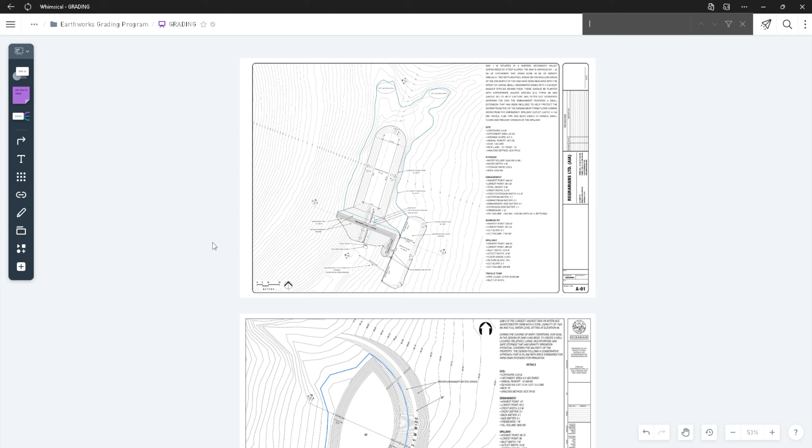Here on this board, I have laid a few examples of some grading projects so that we can break them down and I can show you how I've approached doing those and just run you through my thought process and how I structured the project and then how I went about doing it inside of CAD.

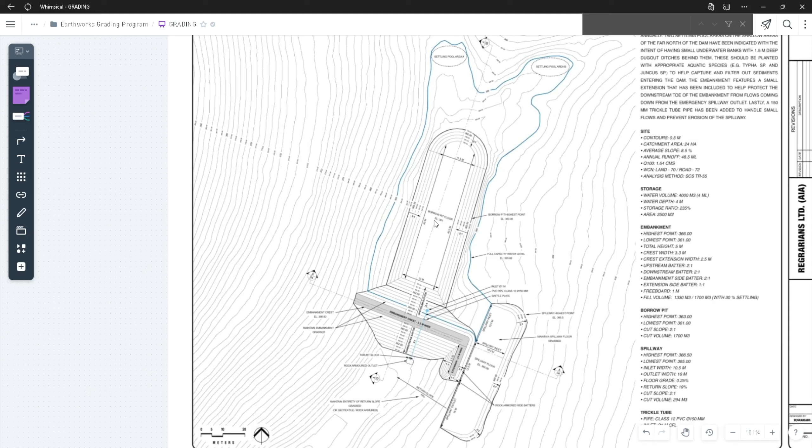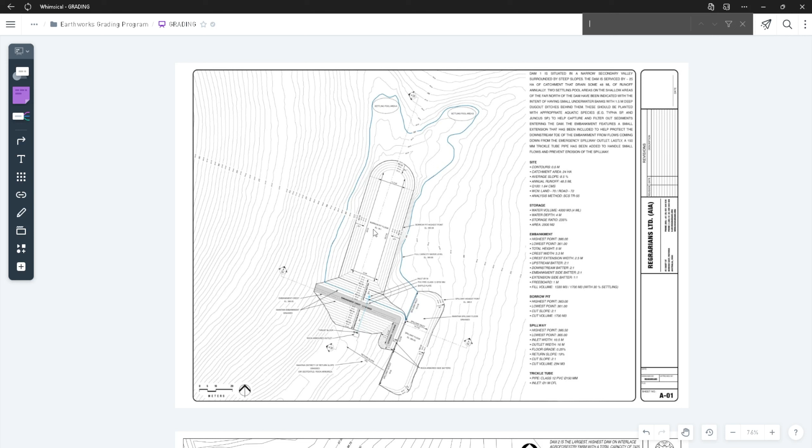Now, the specific type of grading project doesn't really matter that much. It can be a dam, it can be a terrace, or a road, or a channel, but they all share the same principles, except that dams are obviously more complex than channels, and roads are also more complex than terraces. But the way you would build all of those is kind of the same in terms of the thinking process.

So the very first thing, and I'm gonna write here on the side of the board, and I'm also gonna draw on top of these examples. But the very first thing, if there is one, is that we are going to build all of these projects in a modular fashion. So I think this is probably, at least in my experience, the best way to approach grading projects, because if you're building them in a modular way, it's very natural. It's the way you would build anything in the real world.

Like you won't build a house normally from a single block of material. You would lay the foundation and so on. You build everything in stages, and a house would be basically an assembly of thousands of components. And doing things in a modular way gives you more flexibility. If something goes wrong, you can normally repair or do maintenance on just a single part of that whole structure instead of having to repair absolutely everything.

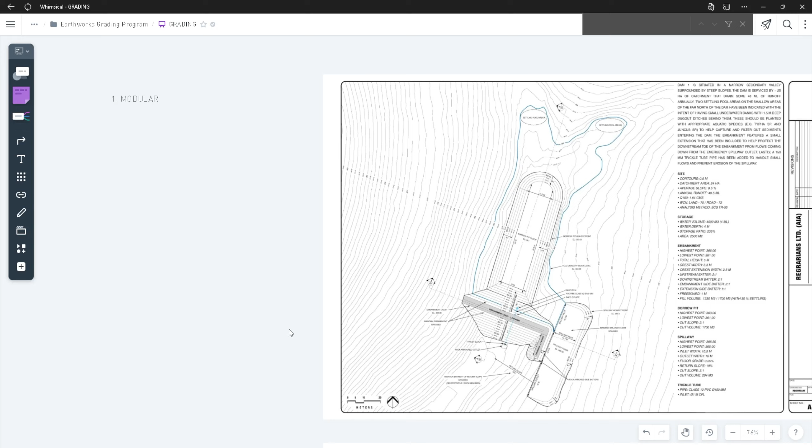And it's the same way in grading. So if, for example, something goes wrong during the grading process with the embankment of a dam, then you don't have to change the entire design. You can just go and repair or correct any errors in the dam, or the embankment model rather.

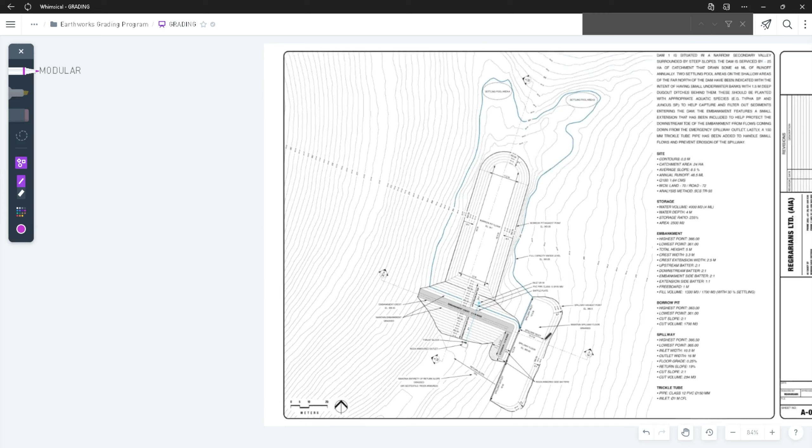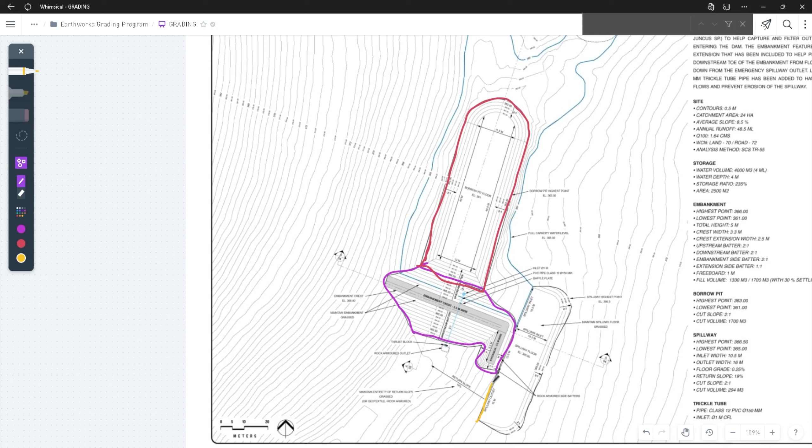So for instance, on this dam, if I were to draw here, just let me choose a color. This dam is built in pieces, so it wasn't built in one single go or as a single element. It was built in several elements, and then those elements were combined together. So the embankment, which is this element right here, was actually one element. Then we have also the borrow pit. So this is this area right here. This is another element. And then we also have the spillway, which is this element right here. So these are all separate elements.

And again, another reason why we build them in a modular fashion is so that we can measure them separately from each other, which is something that will become very important when we get to the later stages of a design, because we want to be able to volumetrically compare these elements to each other and to the existing surface so that we can balance them out. For instance, we would normally want to balance out the volume of earth that is found in the embankment with the volume of earth that we can get out of the excavation pit or the borrow pit. But if you build them all together as a single element, it's kind of more difficult to compare them against each other and to balance them out.

So if we found out that, for instance, the borrow pit does not have enough material in its current form to actually supply that material for the building of the embankment, then if we had built it in a modular fashion, we can just go back and change the borrow pit itself. We do not necessarily have to change also the embankment. But if they were a single element, then we would inevitably have to change both of them. So it just creates more work.

And so I think building things in modularity ripples out through many implications when you're doing grading, and it is my preferred way of doing things. Of course, there is also a way by which you can create or grade a dam in a single go, and I have experimented with those, but it's personally just not for me. It doesn't provide the flexibility I need, and clients may request changes.

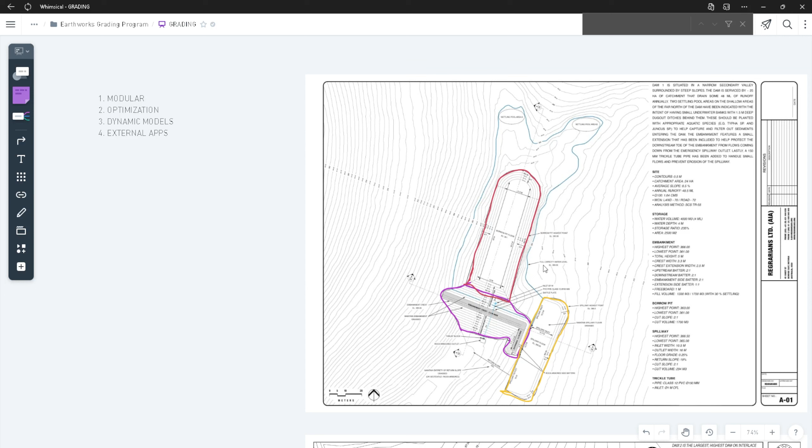But we also may have to use external applications to do some of the analysis, for example, on channels, so channel hydraulics, or whenever we want to calculate flood and storm information. Now, we are probably not going to do any kind of flood or storm calculations in this course, because that has more to do with the design aspect of creating these kinds of models, whereas in this course we're only strictly concerned with grading. And these are two completely separate things, even though there is some overlap or they complement each other. They're very different disciplines or activities. But we may have to use some external applications, as I mentioned.

At the very least, what I'm going to use in this course is Adobe Photoshop to do the drafting in. And we may also use a channel hydraulics software if we happen to require that during the channel grading sections of the course. And of course, I'm also going to use some kind of spreadsheet software, most likely Google Sheets. For any of our GIS work, we will primarily be using QGIS. So we will do a lot of work there.

And of course, Google Earth, which is ultimately the software to which we want to be able to export all of our work. So all of these drawings should ultimately be able to go into Google Earth, as it is company policy for us that we use Google Earth as a communication tool with clients. So whatever work we do, we ultimately want it to be visible in Google Earth, and then we can provide that file to clients to review, and they can also then send us files back with their feedback.

But what I'm trying to say with point number 4 is that there's no software that can do everything. Civil 3D is not going to be able to do everything that you may require, as sophisticated a software as it is; it's not good at everything. And so if you develop a mindset whereby you think in terms of combining software together so that you can leverage each of their strengths, I think in the long term you're going to be successful.

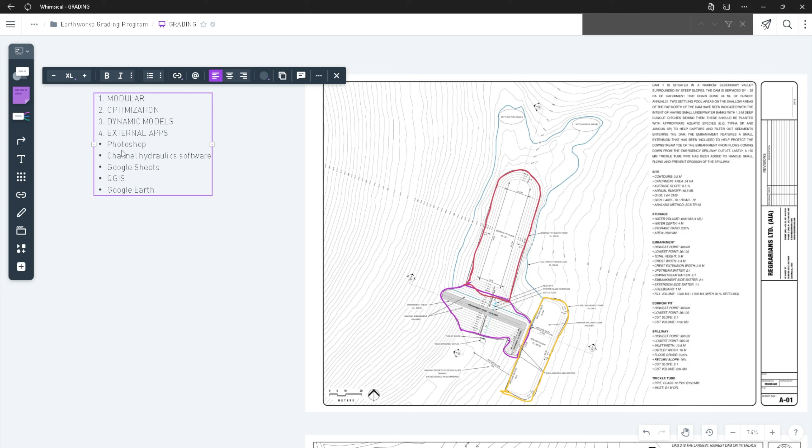Whereas if you try to find this one software that can do absolutely everything, and I honestly have seen that so many times, people just getting frustrated that there is no software like that. I'm like, yeah, there isn't. And if you get hung up on that, then you're just going to have a hard time in this industry in general, because again, there just isn't a software like that. So you do have to combine different applications. Now, we can start a new list to discuss how grading actually works in terms of application.

So currently in these drawings, we only see a 2D representation of these dams. But what you should understand is that these 2D drawings are actually just a byproduct of a 3D model. And this is what grading ultimately is: just 3D modeling. So if you've used any kind of 3D modeling application in the past, like SketchUp or Blender or 3ds Max or any of those, then grading is very similar.

It's just that it's done in a more precise manner, and it's particularly targeting certain volumetric values, whereas in typical 3D modeling, you don't necessarily have to do that. So grading is just more oriented towards these civil engineering kinds of works and details. But essentially, it's just 3D modeling. It's really no different than that.

We have the basic extrusions of shapes and beveling, as well as cutting through 3D shapes and so on. So if you just think of it in that way, then it becomes a little bit more simple and develops a flexibility in your thinking that, well, if it's just like 3D modeling, then you can also manipulate those objects in the same way that you could in a traditional 3D modeling application.

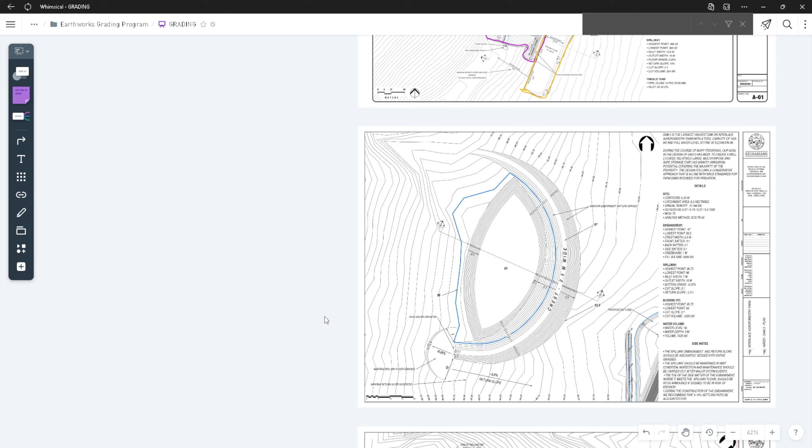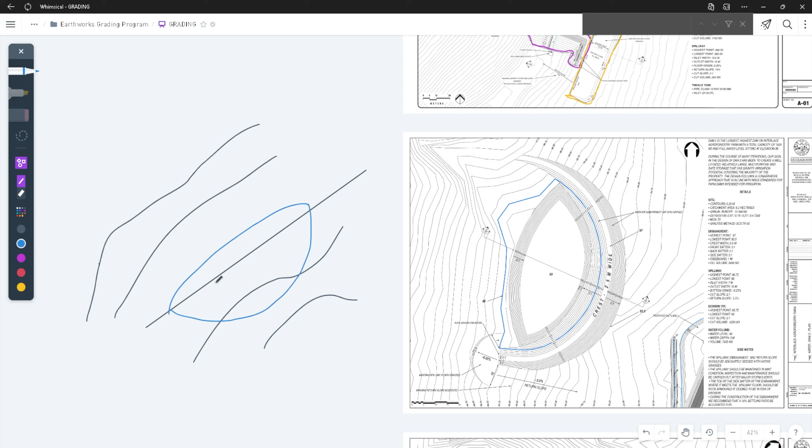But in any case, what you require to learn grading is just to be able to think in 3 dimensions, because what you would normally receive is, let me draw here, some kind of a contour map, and then a basic concept plan. So somebody will maybe send you an outline of a water body, of where perhaps they want to have some kind of a pond or a dam. And that's just about it.

You're going to maybe receive that in Google Earth or on a sketch on paper or whatever it is. But you're going to receive a 2D representation of what a client actually wants in 3 dimensions, because that's what reality is made up of. So your job is to actually add that third dimension to what is just a 2D representation. And that third dimension is the volumetrics.

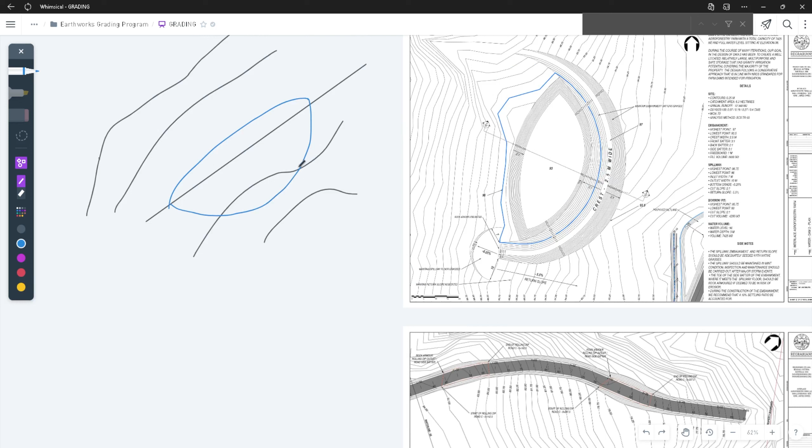So once you come into Civil 3D, you have to be able to think, okay, how can we create this to the exact dimensions and volumes that the client required? So you immediately have to start thinking how you can translate something that is in 2 dimensions into a third dimension, which is the volume.

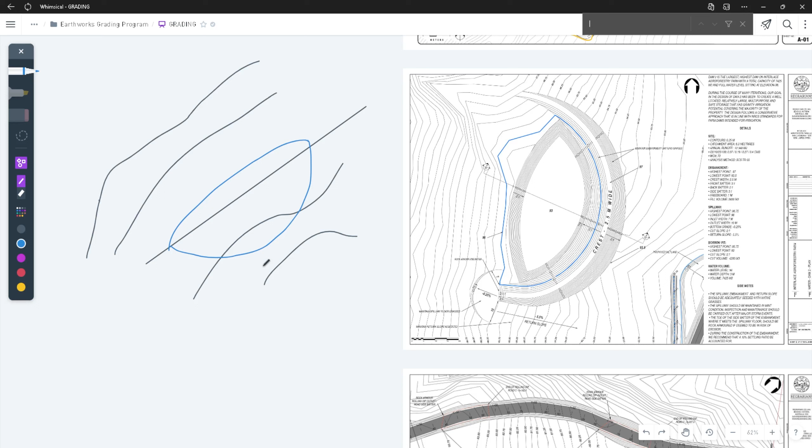So if there is a challenge in grading, it's not actually in the technicalities, because those are very rigid. They're very clear, like the grading criteria, the dimensions. And even the software is not daunting, because, to be honest, you don't have to know more than 5% of almost any software out there, including Civil 3D, to be able to work professionally with it in the field.

But the challenge is to actually visualize things. And that is something that nobody can teach you. Software can be taught, grading criteria and requirements can be taught, but visualizing is something that is just very personal. But if you are able to develop that kind of thinking, then you're going to be very successful at grading, regardless of whether you're good with computers or software, because those things can be learned. If you have imagination, then you're going to be really good at this, I believe.

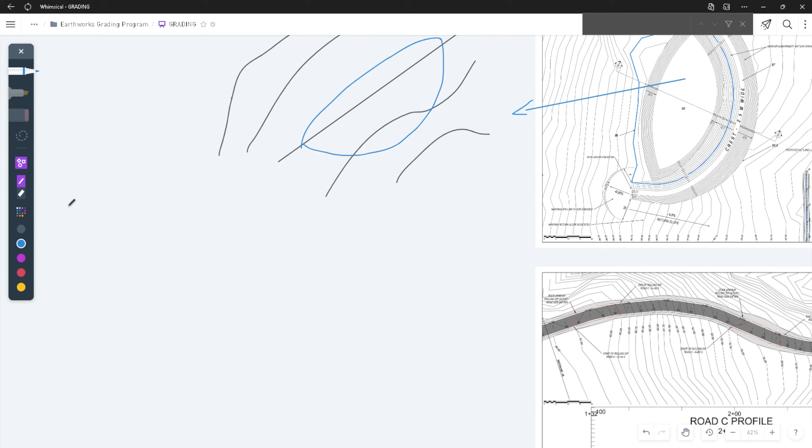So if we take this simple 2D sketch here, which is based off of this one, and try to translate it into 3 dimensions, we basically have to think of it in a profile view or a cut section. So we would have the existing ground, which from the side would look maybe something like this. And then we have the water body. So we may imagine, okay, this is going to be somewhere here. We're going to have an exact idea of the elevation of that water body.

So let's say that this contour right here is at elevation 100. And so we know that that's where our water body has to be, just sitting tightly at full capacity at elevation 100. So from there we can infer where the elevation of the dam crest is going to be. Normally we would want that to be at least 1 meter higher so that we can have some freeboard. So let's say that right here is 1 meter higher than the water level.

And then we just have to decide, okay, how wide is this crest going to be? Are there vehicles that are going to be passing over it? If so, then maybe we want it to be at least 5 meters wide or 4 meters wide. So these are criteria that you will be provided with.

You don't necessarily have to figure those out yourself because they're written down somewhere in the documents of the agencies that govern these kinds of work in the particular jurisdiction that you're working in. So these are not things that you have to figure out. They're just provided. So you just have to make your models according to them. So again, like I said before, this is the easy part of grading because these things are just spelled out for you.

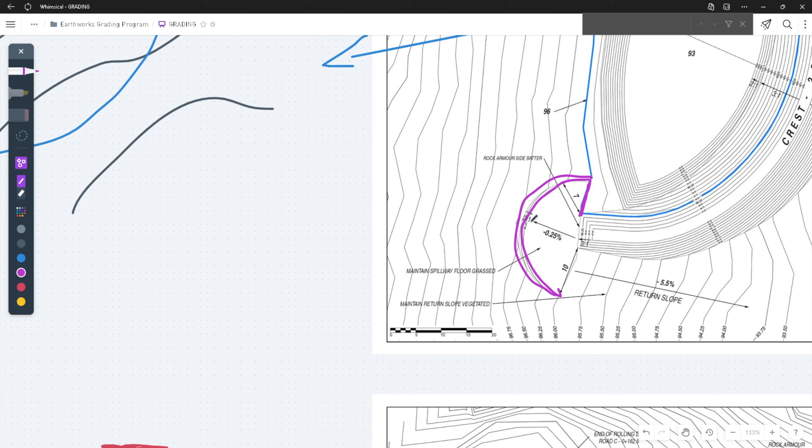And you may also have a slope on the bottom of that spillway. In many cases you don't have that, but you may have it in some cases. And once you have all of that, then the shape of the spillway is already defined from all of these criteria. And then all you have to do, really, once you mark the bottom, is to grade upslope to the surface, so that you're going to create this small grade here, in which case we have a 1 to 2, and the spillway is basically complete at that point.

But again, in no part of this process did you have to actually figure something out yourself. Most of this is provided for you. What you have to do is to be able to visualize how it's going to look in 3 dimensions, and to simply execute it according to the grading criteria through the grading software. So you do need to know a little bit of the grading software to be able to do this, but most of all, you need to be able to visualize this stuff before you can actually do it and do it well.

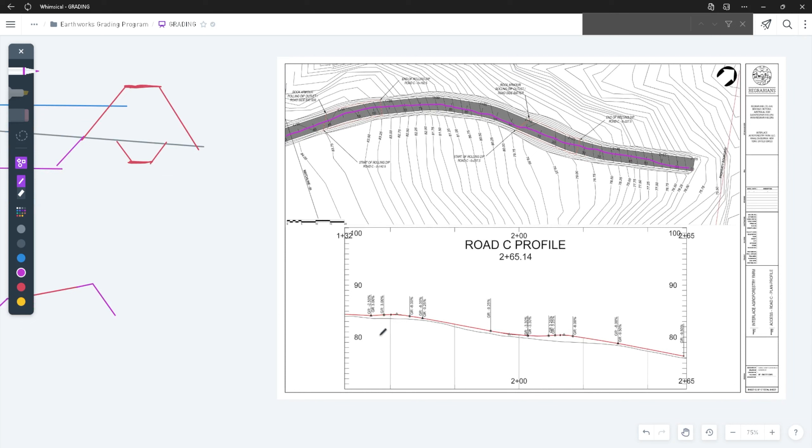A road will also have a profile, and on this profile you can dictate how the road travels relative to the existing ground. So the existing ground is this thin gray line here, and the alignment of the road is the red line. So through the alignment on this profile, we can manipulate the vertical aspect of the road and where it may have to cut and where it may have to fill relative to the existing ground. Through the alignment, we can also create features like rolling dips, for instance, to facilitate drainage.

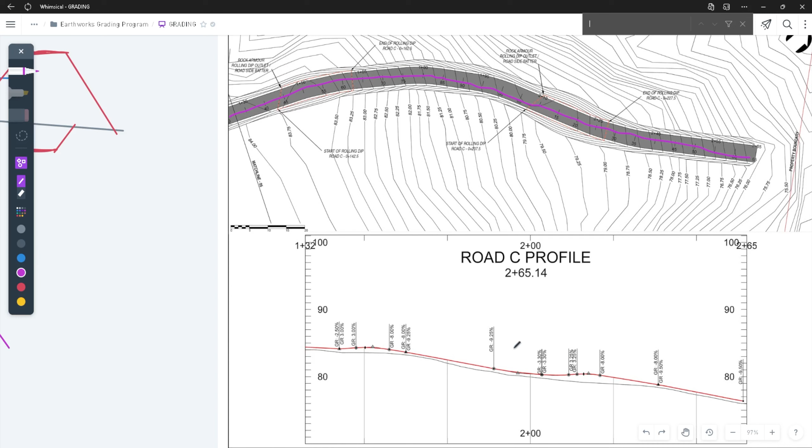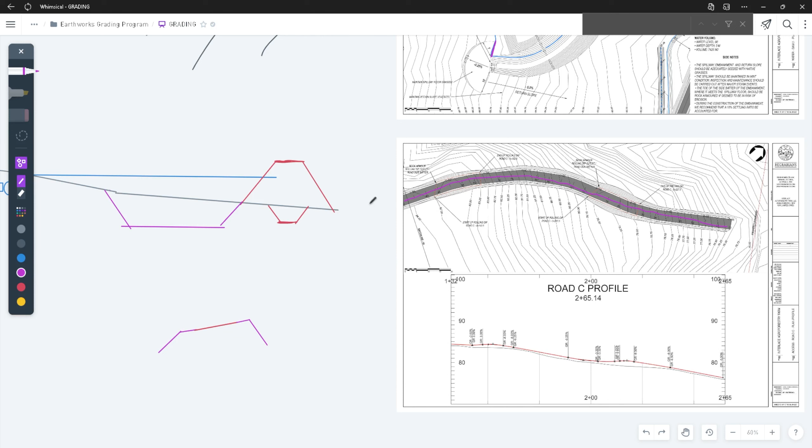And again, these are simply structures that you can grade very easily through an alignment just by following the criteria that you've been provided with. But again, in none of this did you have to figure anything out except for just visualizing where these things should go and the way in which you can build them. The actual technicalities like the grading criteria, these are provided for you, so you don't have to figure those out most of the time. This will become more clear as we go through the course.

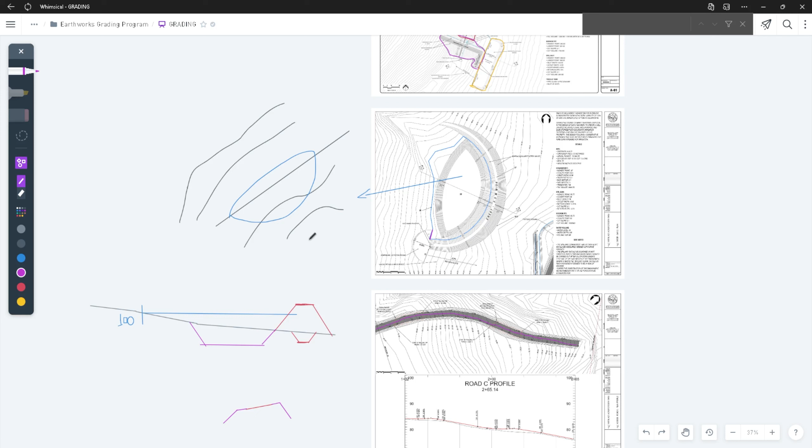I hope I was able to explain this to some degree, but to get back to my point, to be successful at grading, you just, for the most part, need to be able to visualize things that you receive as a two-dimensional representation in 3 dimensions. And then you may need to know a little bit of the software.

But if you have strong imagination, then grading really is not that difficult, and it is a very interesting field, and it can also be a good business for you because not many people actually offer that service from what I've seen, especially in our sphere of work. And it would be good if more people offered it because there is, in fact, a lot of work to be done in that area.

In the next session, I'm going to lead you through the actual process that we're going to follow in a lot more detail for each of the types of structures that we're going to create. So for dams, we're going to have one process. For roads, there's going to be a somewhat different process. They're all very similar. They all follow the principles that we're talking about here, but they have their little nuances that you should know.

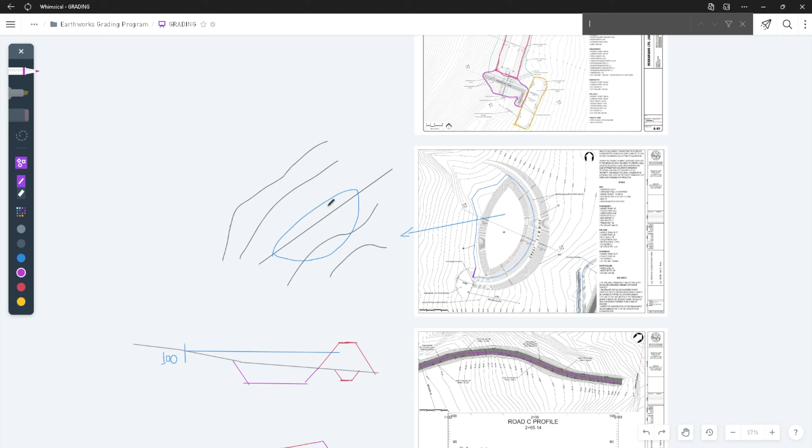And all of these videos in this overview module that deals with the workflows are meant to be referenced so that if you ever get lost during the course, you can come back to these videos and get an idea of where you are in the process and a more general overview of how things work. And I will also mention throughout the course when it may be a good idea to come back to these overview sessions. And I'm also going to come back to these charts, for example, the water storage pipeline, and mention where exactly we are in the process so that it can help provide you with a sense of orientation.

For now, this is it for this video. I hope it has been useful in giving you an idea of how grading works and how you can think about it. And now we're going to proceed to covering the workflows that we're going to be following for the different types of structures that we will be creating.